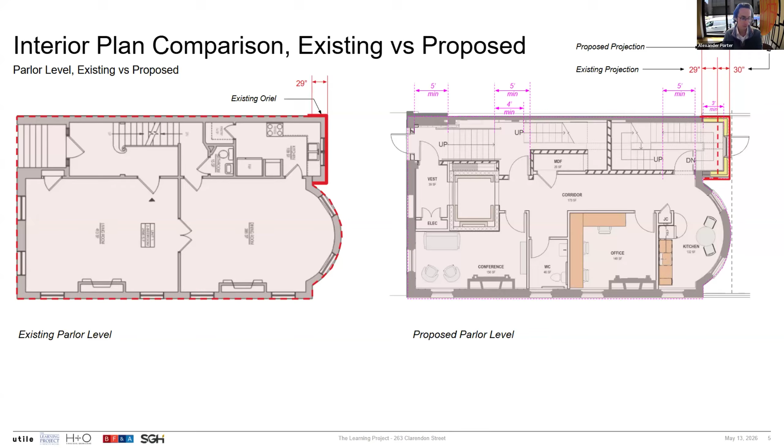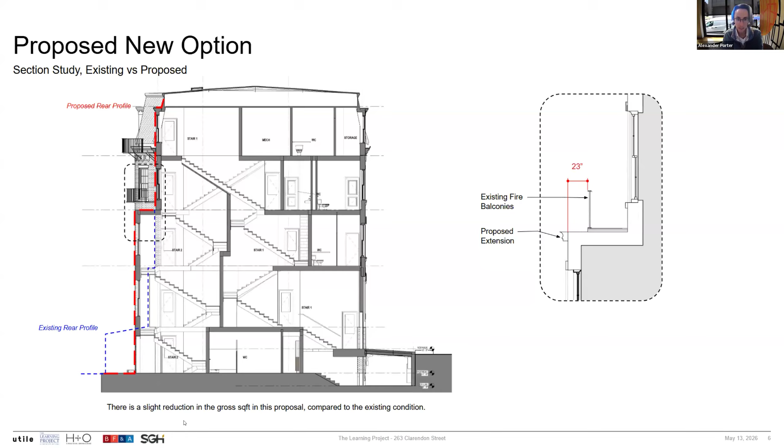We also did an area analysis, and this extension is actually going to be a little bit smaller than the current building.

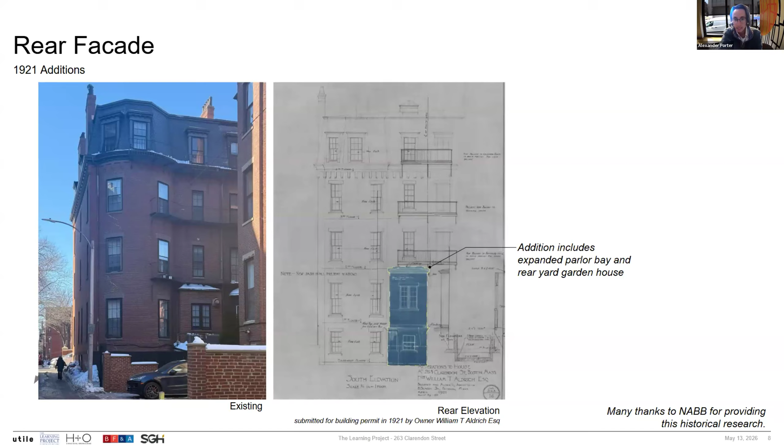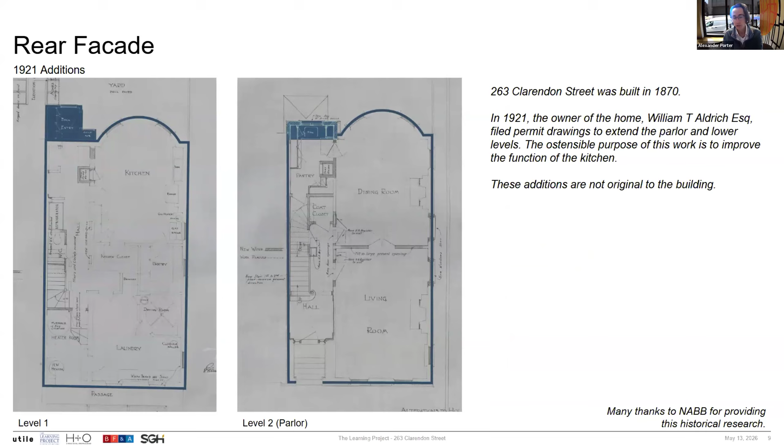So this is a picture of the back of the building as it currently is today with that oriel that was added, and there's also an addition on the lowest level. We found with the assistance of the Neighborhood Association of the Back Bay that these were additions from 1921 by the owner. The next slide shows the plan so you can see those two additions that more or less are intact today: the projection to enlarge the kitchen on the parlor, and a kind of storage room on the lower level.

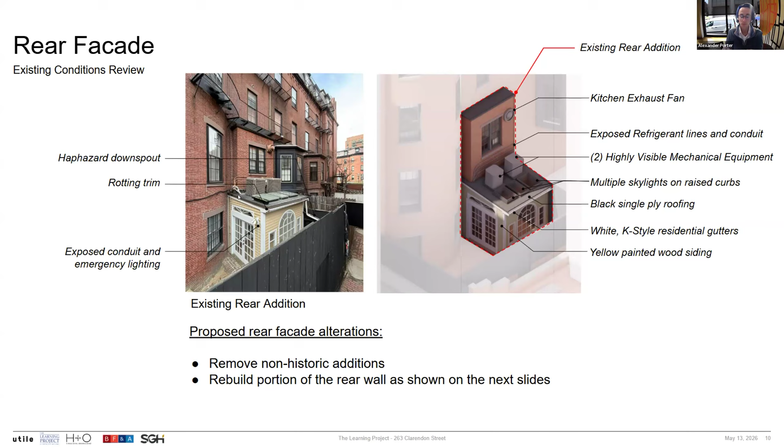So these are not original to the building, and today when you look at the additions, they're a bit of an eyesore. They have a number of undesirable conditions we want to rectify, including an exposed kitchen exhaust fan, exposed condenser units that are highly visible for the neighbors and from the alleyway, a lot of exterior trim in disrepair, and exposed conduit feeding both the electrical fixtures and exposed line sets feeding that equipment. So we think this proposal is a way we can eliminate all these conditions and provide something much more trim and in keeping with the residential character of the alleys.

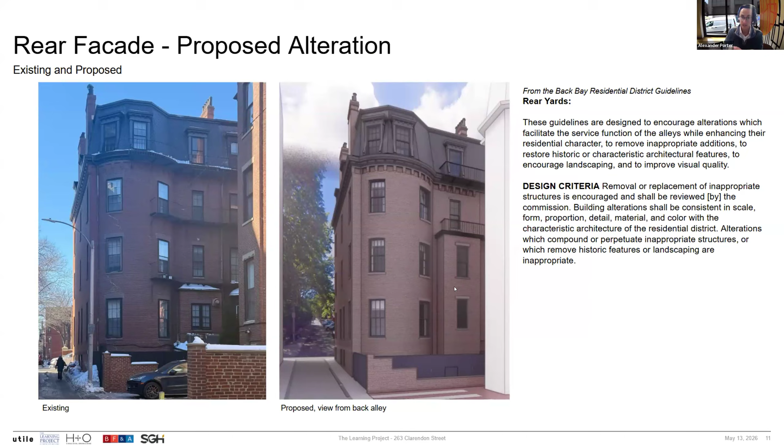So here again is that comparison we discussed with the subcommittee, which we believe enhances the residential character of the alley, as the guidelines request for the rear yards. You also see that the fire balconies that currently extend past the bow of the building, we're going to cut back so they can still provide fire assistance and entry into our second stair in the event of an emergency, without encroaching on the bow of the building.

This is a view showing the same addition from Marlborough Street. It's not visible from this vantage.

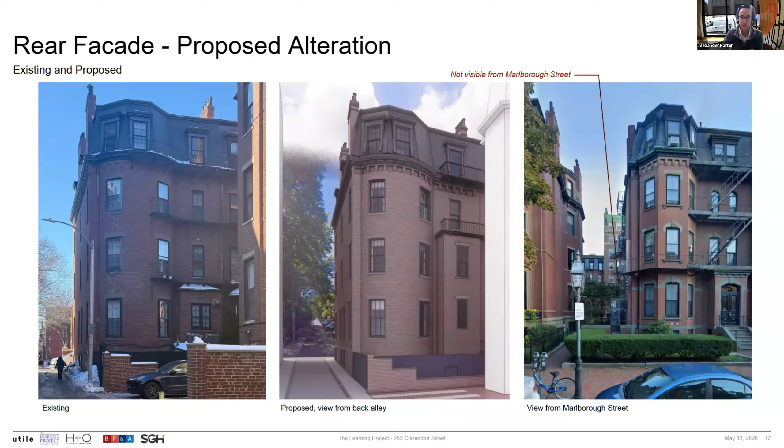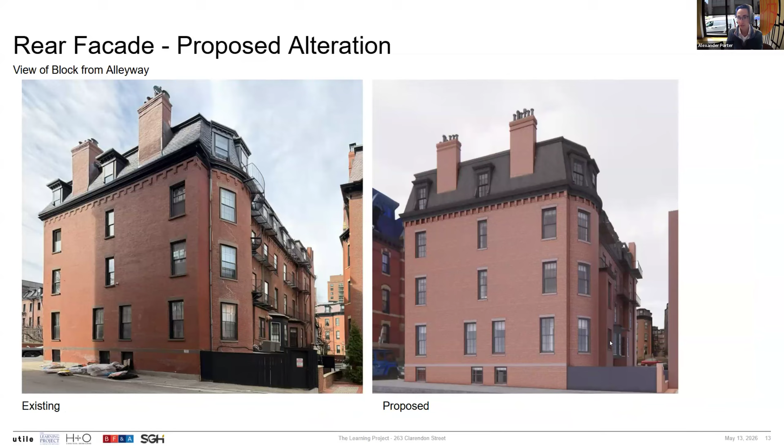And then another view from the alley showing the existing condition on the left and the proposed condition on the right, kind of showing that it is keeping in rhythm with the bow, the two oriels of the neighbors, and then an existing step of the building on Marlborough Street.

We have to provide some air source refrigeration equipment to heat and cool the building using electricity. This will be an all-electric school. It will not use fossil fuels to condition or provide any energy for the building's domestic hot water.

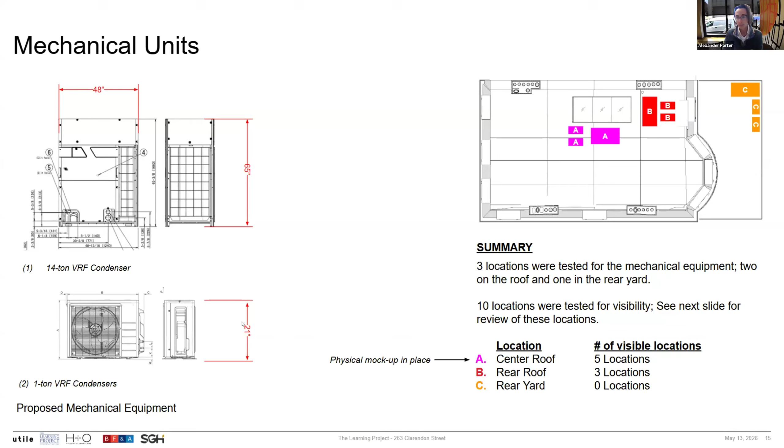So these units come in the form of a 14-ton VRF condenser and two 1-ton VRF condensers. Those smaller ones are more residential size, while the 14-ton one is a bit larger. These units have to sit on stands to avoid snow accumulation.

So we studied 10 locations and took photos, mathematically calculating which locations were visible and from where. The magenta location in the center was visible from 5 locations, as Joe mentioned, both in public alley 423 and 424, as well as some locations in the park. I'll show you enlargements in a moment.

Location B was not visible from the front, but much more visible from the back, so that was a consideration there. Location C is not visible from any location in the public way.

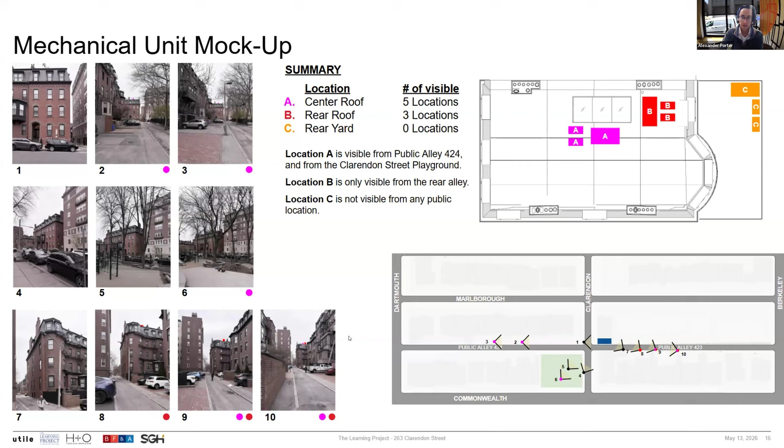So the next couple slides just walk through these views in large. This is right in front of the building. This is moving back down the alley. You see in magenta the location of that equipment.

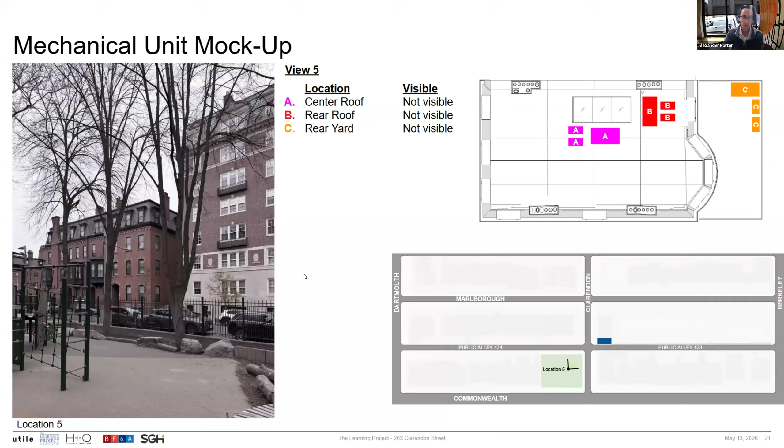As we move further down alley 424, it's not visible from Clarendon Street or from that location, but if you back up to the next location, you are able to see it, albeit through the branches of the trees.

Moving down public alley 423, neither location is visible from here, but as we back up, they become more visible. This location, you start to see the units in location B, and moving back, they both become more visible as you move further away.

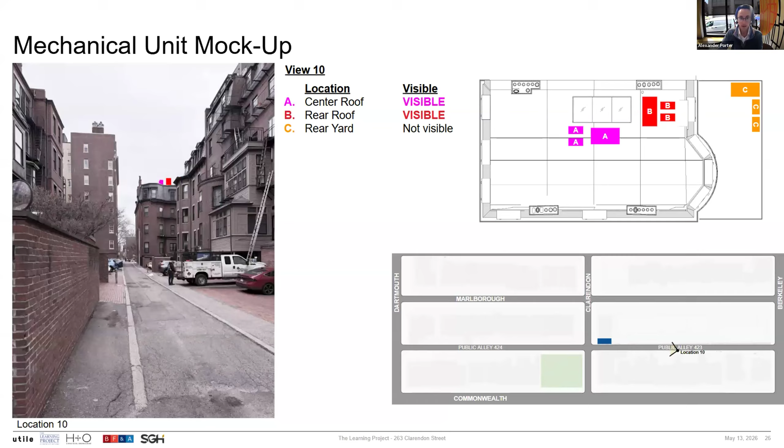So the next slide is our other solution for location C, which puts the units in the rear yard. We discussed this with NABB in their meeting last week, and would be open to considering some screening additionally if this is the preferred location by BBAC.

These units, even on their stands, will not extend past the fence because this is a recessed, sunken lower level, and that fence will extend over them by at least a foot or two.

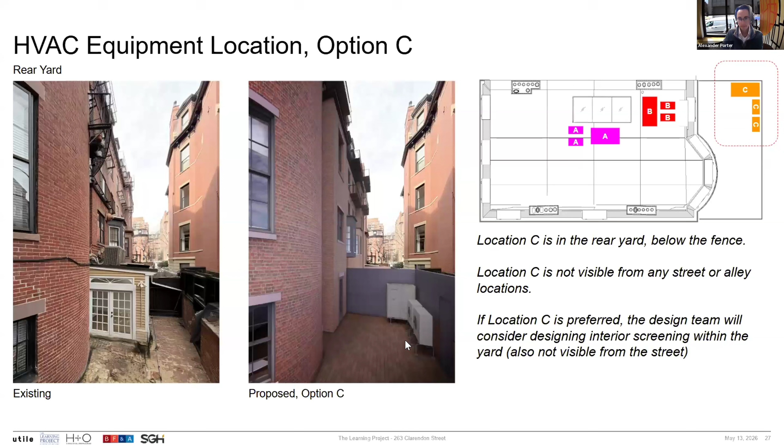Then just to show you the other roof penetrations, these are all pretty ancillary, but there'll be a couple of air intakes added to this roof. They'll be quite low, 15 inches or so, not visible from any location.

We are removing 4 rooftop condensing units, regardless of the location that is selected for our new condensing units that you see right there. And you, I believe, told us before that there will not be any elevator overrun. Is that correct? That's correct, Tom, and we have a slide about it, our last slide in the deck.

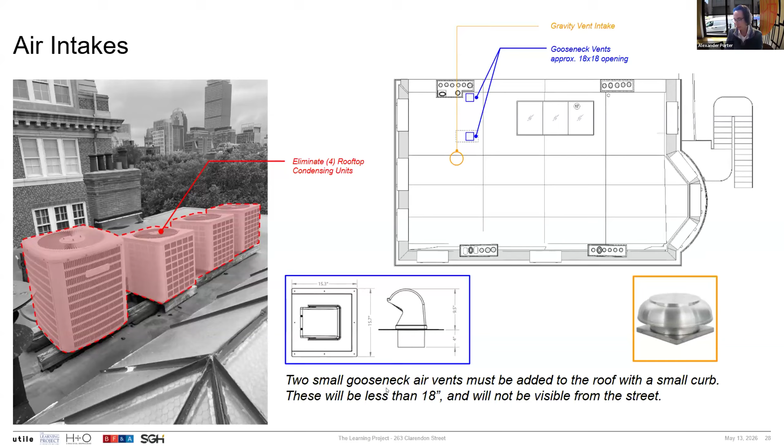Sorry. No, jumping in- that's okay. Yeah, all right, I'm going to keep going.

We can certainly come back to any of these slides. But I want to get back to the front of the building. We have an existing condition where, as we described in plan, we have steps that get us to that first floor, the piano nobile. You can see the existing condition here.

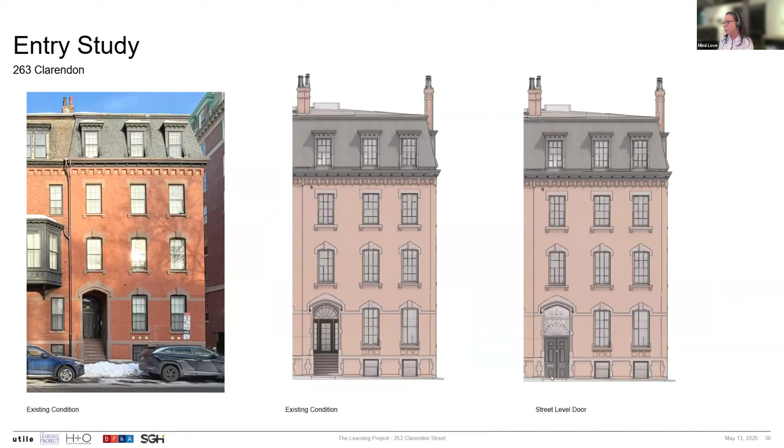Because we need to create an accessibility entrance, we are proposing to bring that door down to street level. And you can see the reason that solves our problem is that once we get in the building, we can create a lift, a landing for access to actually the elevator in our new proposed scheme, and then stairs that get us back up to that first floor level.

We're pushing the stairs back. One thing I just want to highlight is we talked about a couple of examples in the Back Bay area, but 267 is a building 2 doors down where we think leveraging somewhat symmetry, it's not identical, would be a nice solution.

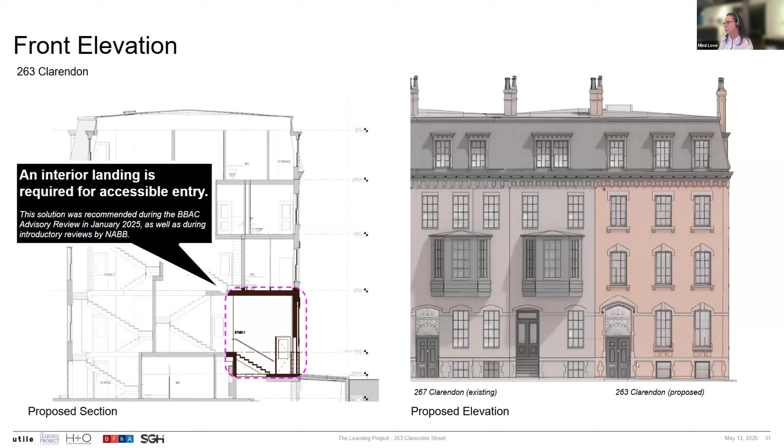That door, it's not quite an ADA condition because it has a 7-inch riser underneath the door. We would have to be flush at grade in order to achieve it. But this is that side by side, that's that 7-inch rise that I was talking about.

There is an iron work that we think would be nice to replicate, again, to create that balance and symmetry of that elevation on Clarendon Street.

And we're taking some cues from the geometry. We have that lintel here, which really dictates some of the trellis components, the pure geometry of the fan. And the reason I'm mentioning this is because we've really worked on the proportion of the door. We think an 8'6" door really allows the geometry of the ironwork above to work well with the proportion of the door below.

The 267 and 263 are more or less aligned, but they're not identical because we're proportionally trying to make sure this door is appropriate for its entrance, which is a bit wider than at 267.

We are looking at two solutions, one that has just fixed panels and another option that has side lights for viewing and security visibility in and out of the doors.

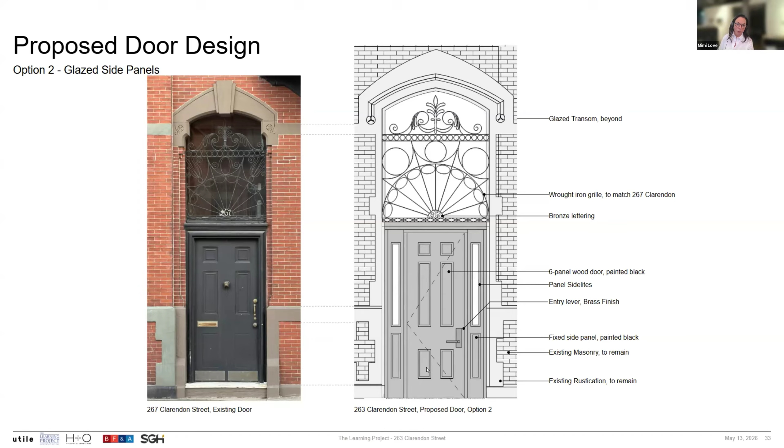So this is our proposed solution. We prefer the side lights, but are open to comments.

And we would like to replicate a sign similar. We haven't really gotten into what the text says, but it will definitely identify the school. We think it would be appropriate here beside the door.

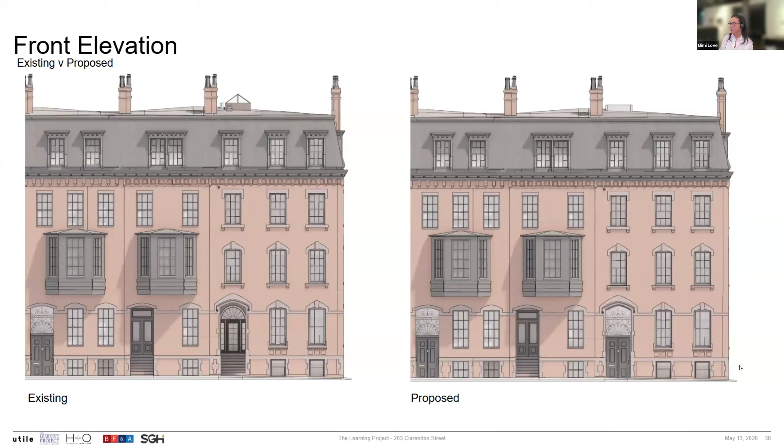And so this is a comparison of the elevation that exists today and what we're hoping to accommodate with that ADA solution. And again, it balances out the elevation that faces Clarendon Street.

So some additional items, just so we're aware of the scope of the work. We are planning to replace all of the windows. We think this is a benefit because they will be true divided lights. These windows were replaced in its former life.

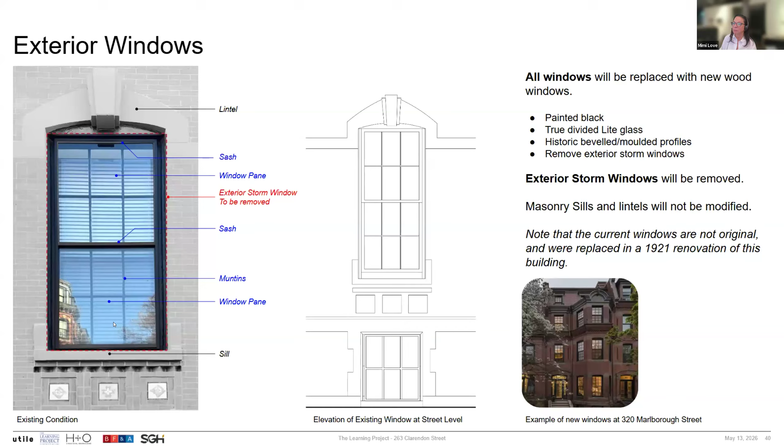We're going to be able to remove the exterior storm windows. We are looking at Belle Isle windows. They were used at 320 Marlborough Street. Again, they have true divided lights, and that will be a replacement for all of the windows.

The other item, which is really just a maintenance issue, is the skylight that exists, which is in terrible condition, and we want to replace it in kind. The location, the size, the dimensions will replicate what's there. We will have to have an exhaust, but that will be a minimal opening that we'll include, but otherwise it will be replaced in kind.

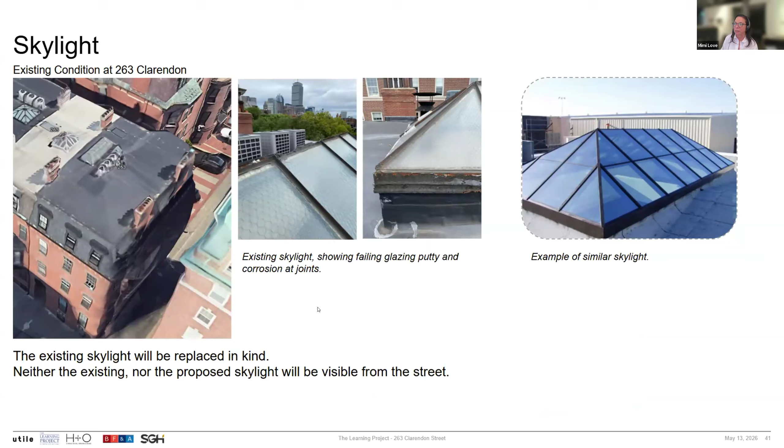And then the fence - currently there is an existing wood fence. It does have a raised door to provide access to the easements along the way. There's some stairs that connect all the rear yards. We're proposing to do a fence that's similar and made out of wood.

And what color is that going to be? So we prefer to keep it similar to what it is. Right now it's really a black that we think might be a bit too harsh. So we think in the darker tones it could take on a green tone. We like this black forest green color. Just to give it a little bit of color, but black iron could be another consideration.

And then we have minimal lights that just light the pathway. We think something that could just be simple and almost not call attention to itself could be a good approach.

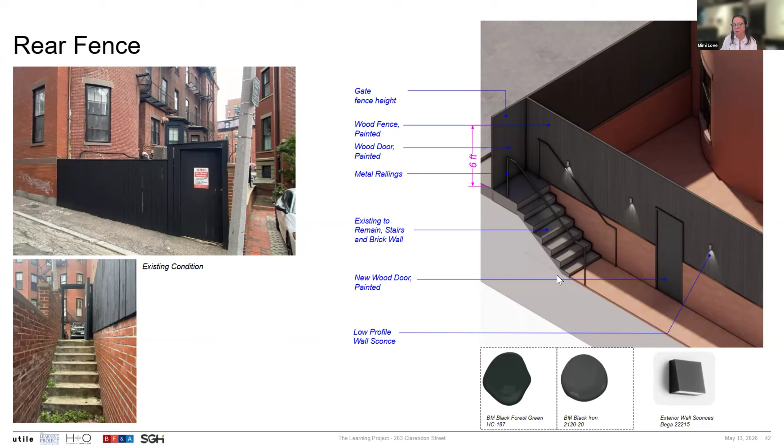So we talked about the height of the fence. So this is a construction - we imagine the exterior will be tight joints. It'll have a top cap, but on the interior we'll change the boards to be horizontal, just to be able to have some gaps within the frame construction for movement and breathability.

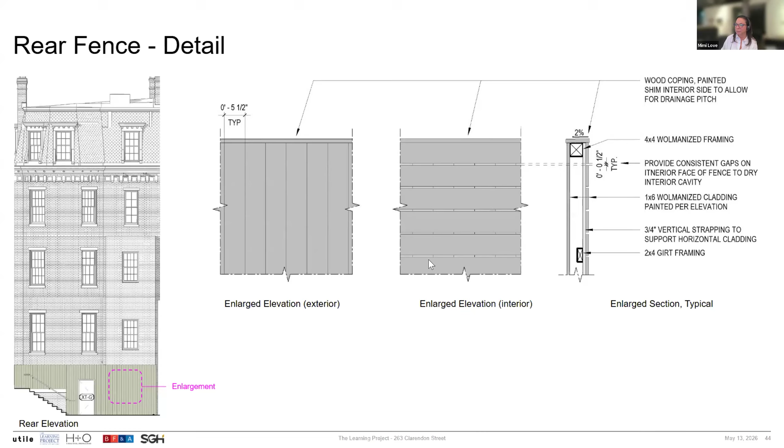And that's all we have. I know that's a lot. We're happy to go back to any slide.

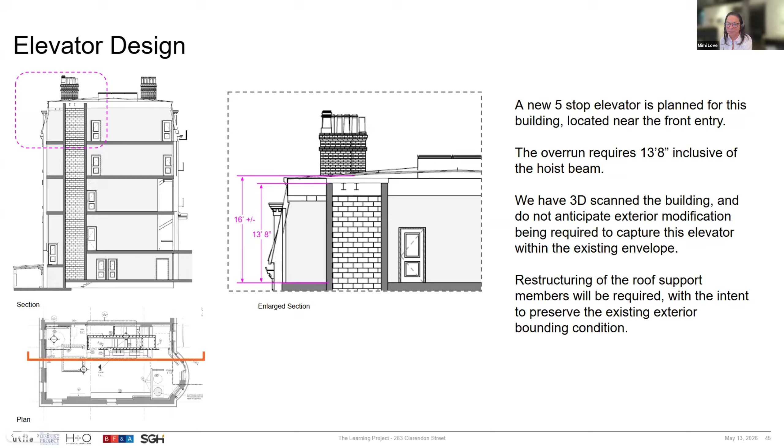Fortunately, you have all of the subcommittee members here. I know, that's really fortunate. I think Rob, you're muted. Sorry about that. Yeah, Lisa was on the subcommittee. Yes, all right, well, yes, the president is on the subcommittee.

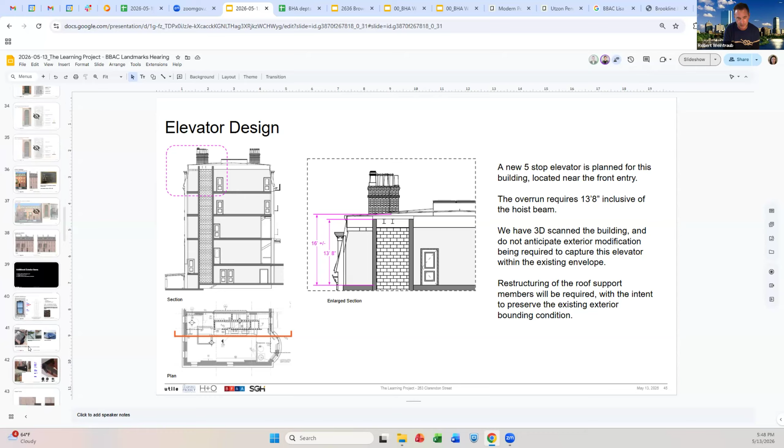Yeah, I think the fence is wonderful. The downlights are appropriate for security and visibility for walking. The color, I'm indifferent - black or the other two that you recommended. Those are interesting colors.

Yeah, I'm ready to make a motion. And I agree with Rob. I do think there are some precedential issues we've talked about - because they aren't precedential, this is a unique kind of building. We are making some deviations from the guidelines, both in the front and the back. And if we decide to put the HVAC equipment on the ground level, which I agree with Joe makes the most sense, so I think as we craft the motion, I'd like to suggest some language relating to that, just to make it very clear this is a special case and not a precedent.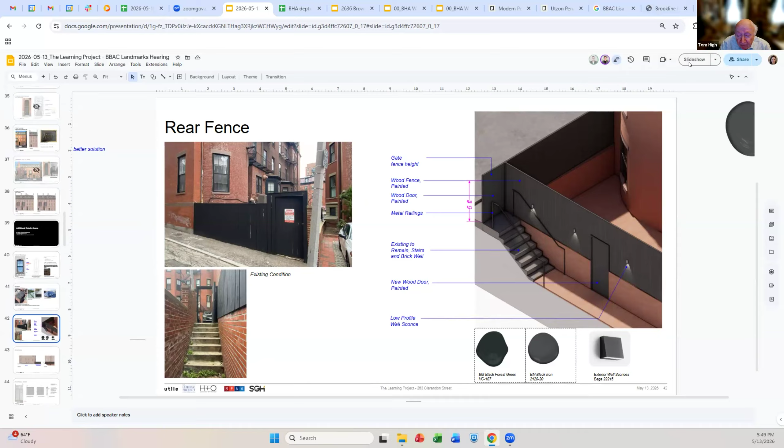But I also think that some of the details we've talked about can be handled if Joe's willing to refer them to staff - location of the signage, color of the fence, and all of the other details. I don't think you're far away from where we would all be, but I would want to have Joe take a look at the final and have final approval of those.

Okay, Joe, please, are you ready to move to comments, or does anybody else have some? Rob, was there anything more you wanted to say with your motion? No, I mean the sign's appropriate.

I assume the sign is going to have a black background and be in brass and be the same size, or thereabouts. I can't imagine they'd want to change the language too much. So I think the sign's fine.

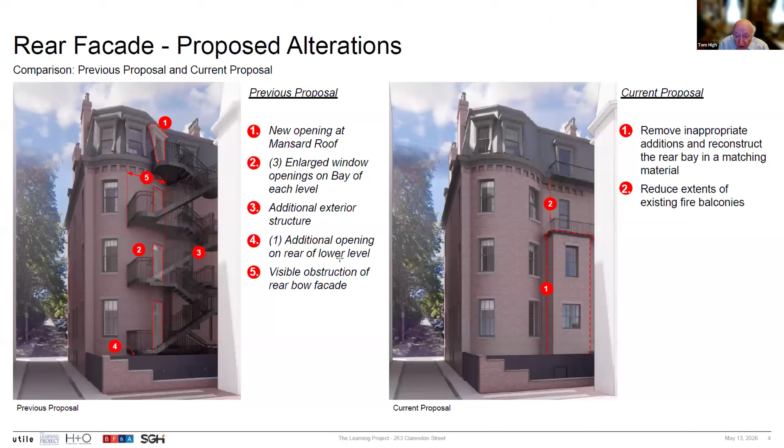Are we all okay with having the HVAC equipment on the ground level? Oh, absolutely. It's not necessarily a precedent, Tom, because I think we just have to make it clear that this is an unusual building, both because it's been approved as a school and because of the size of the building, which is atypically small, and its location on a corner. It's really quite unusual.

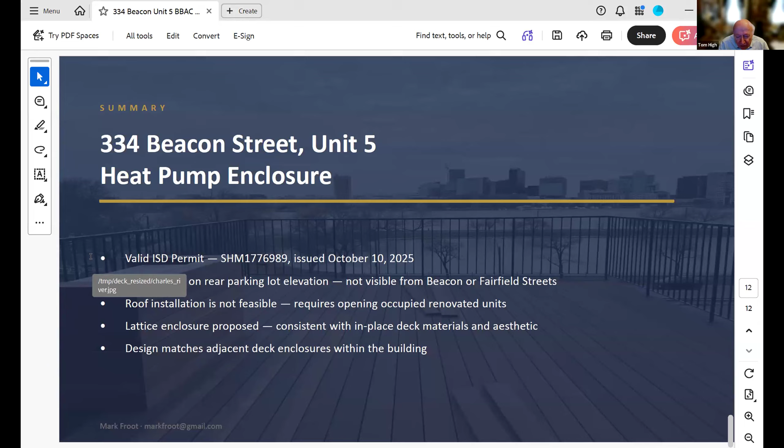What you look at from the ground, you still see the equipment because of the way the lattice is designed. Can you give more detail on what that's going to look like and how visible the equipment's going to be once it's put up?

Well, the intent would be to use this exact lattice here. I don't have the exact dimensions of the slats offhand, which we can report back to the committee. But the intent would be to cover it as much as possible and try to blend it in.

Can you move the equipment further in towards the center of the deck? We can. The only issue is there's one window from the unit that looks out to the deck and to the Charles River, and placing it there would completely block the view.

The location is on the parking lot side of the building, on the back street, not particularly visible from Fairfield Street. And then there's the other air conditioning unit that's been put in the same location on the unit below.

And you're not dealing with that unit? Understood, of course. No, I mean, that was a question — is the unit below different, because it doesn't seem to be masked either, from your picture.

Yeah, Tom, I think that's probably a violation that I'm going to have to follow up on. Okay, yeah, because we're trying to deal with one, and you've got another one which is being used as a precedent for this. So, the other one is a violation.

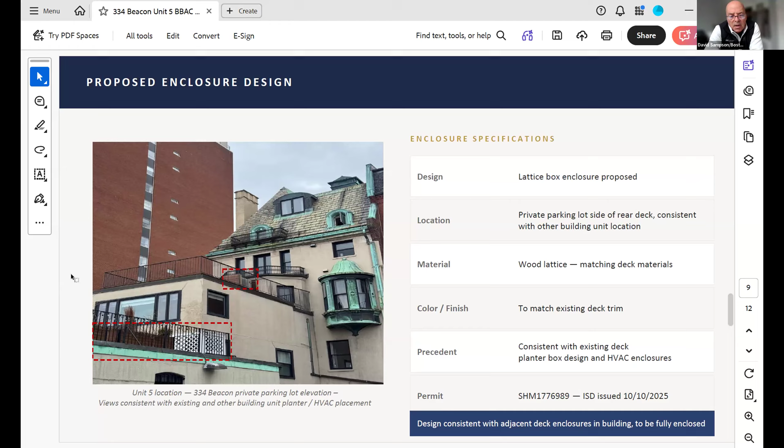Mark, do you have a photo of the view looking out the window so I can see what the deck layout is? This is probably the best one, if you can see it. This is a photo basically as soon as you walk out onto the deck, looking out. So there's effectively nothing else.

We looked at potentially putting it on the right-hand side of the deck, but that view issue is pretty significant there too. You'd potentially be able to see it from Fairfield Street, and given that's a pretty public street, we thought it wouldn't make sense over there.

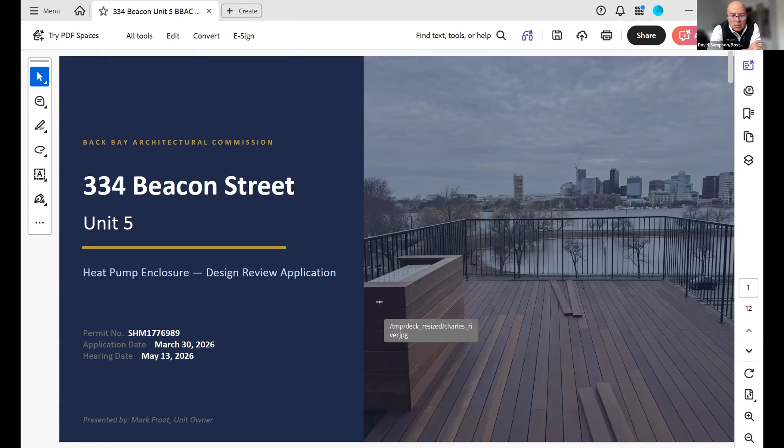And you don't have a photo of the deck from the railing to the building, the opposite of this? I don't have one. This is probably the closest I'll get. I don't have one in this presentation, unfortunately. Looking back at the windows, you mean? Yes. Yeah, I don't have one, unfortunately.

I'm wondering if you can fit this up against one of the windows of the building, or somewhere back in that corner where it's not visible. The problem is the shape of the building — it juts out a little bit, so the ability to put it along there without putting it in front of a window is actually impossible. We would have preferred that, but this location mitigates everything across all those different variables.

Mark, could you show the picture again, showing it from the parking area? This one? Yep, yeah, it's a reasonable shot of it. Is this a heat pump? Yes. Those windows to the right of that box, there's a little walkway down there.

Is there a way to get this down there on the ground where it can't be seen from anywhere? No, that's actually a fully landscaped private courtyard area for one of the other units. You couldn't get it on the side of the building down there? You'd be in somebody's courtyard area.

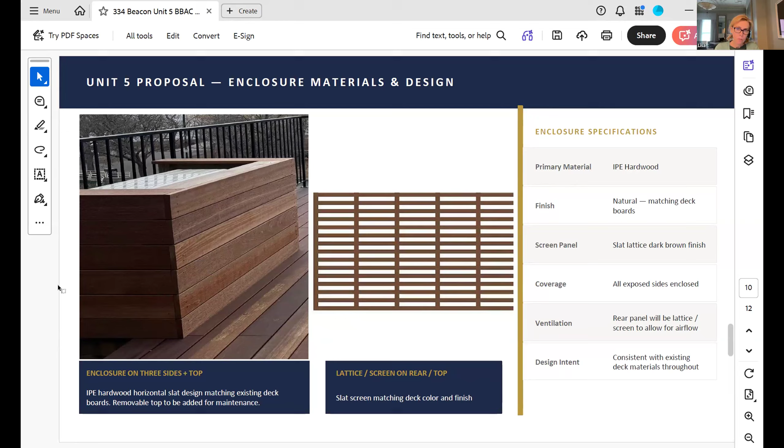If I might, this picture on the screen now, that long wall of the heat pump - if we flip this 180 degrees, that would be the view from the parking lot. That would be the side you'd be seeing, and you would not see the other side from Fairfield, is that correct? Correct. No, you wouldn't - because right now these photos, just to be clear, these photos are with it installed. So from the Fairfield side, you cannot see anything. Okay, I think that's a good idea.

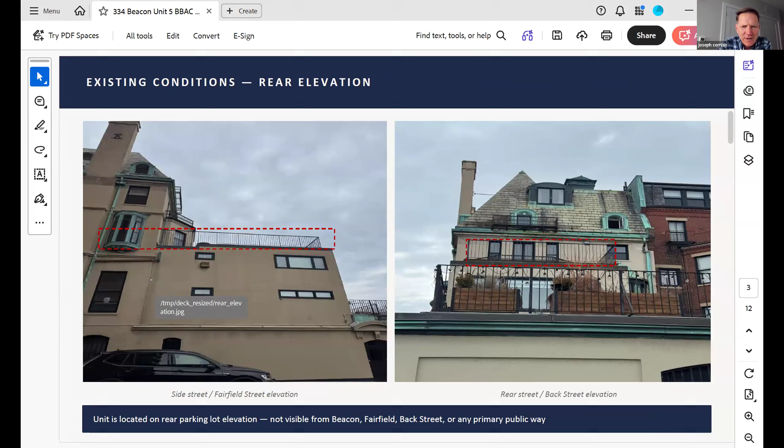I'm ready to make a motion. Okay, I will just - Jeannie, I'll get the script up for you. Here. There you are. It's not showing yet. Do you need me to give back the screen? I can just move to stop sharing if you could share the agenda. Yeah, sorry, I'll give you back the floor. There you go.

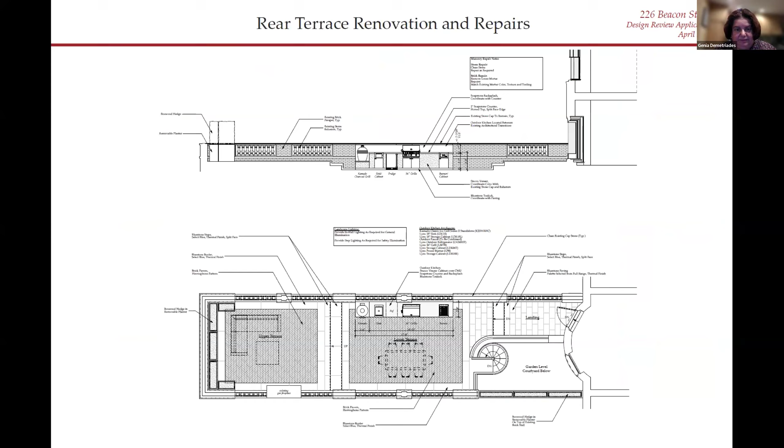Okay, I believe we're going to 395 Commonwealth Avenue next. So Rob, are you here? Rob Clocker? Yep, I'm here. Okay.

Joe, do you want to read your comments first? Sure. This is for application 26.0905BB, 395 Commonwealth Avenue. At front facade, replace upper floor windows, reinstall, recreate historic stained glass, make minor facade repairs, refresh landscaping, and install new fence. And at rear elevation, remove basement addition, create new parking area, garage door and garage access, add basement door and window, replace upper windows, repair facade, and provide new landscaping.

Staff notes that 395 Commonwealth Avenue is a 5-story row house built in 1899 to 1900 for Frederick Eyre and designed by Alfred Manning and Louis Comfort Tiffany. The proposed work is similar to work previously approved by the commission in 2022, and I circulated those plans to all the commissioners.

However, the rear garage door is larger and there is a reduction to the landscaping at the rear of the property. The proposed plans show a proposed roof deck consistent with a deck approved in 2022, but similar to the previous application, that work was not included in the written project description. So that will not be included in tonight's review of the project, and we can review that at a later date. Staff recommends approval, finding that the proposed work is similar to what was approved by the commission in 2022. The applicant will need to submit a new application if they wish to proceed with the previously approved deck.

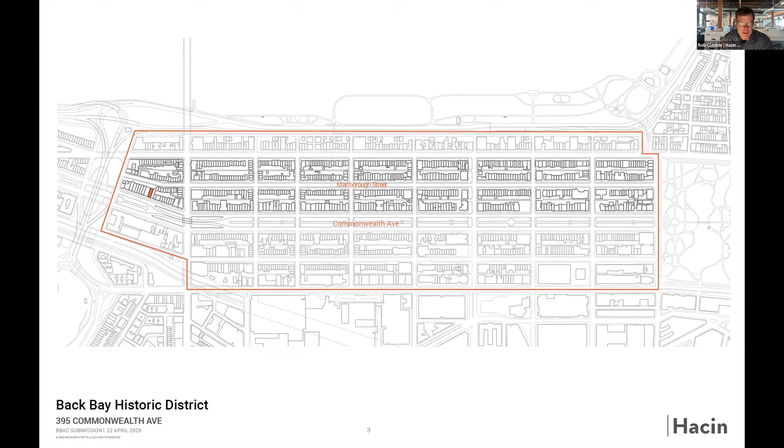The Commonwealth Avenue facade is unchanged since 2022. No work has been done on the building, but it had previously gotten some restoration work by two owners ago. On the first floor there's an existing half-circle stained glass window over the entry door, and the three panels adjacent to it are just plastic replicas put in as film, but the original stained glass in the two side windows is missing. The center window is in a crate inside the building, and there was a previous review by a contractor as to how to restore that, as well as recreate the two side windows based on that patterning.

So what we're proposing at the front of the building is to do exactly that: put the center stained glass back in place with original material, then recreate the two side pieces.

The notes in red indicate changes to the facade. The ones on the left are removing some accessories that were added to the building, and I'll talk about the fence in a moment. At the upper floors are non-original replacement windows that we're proposing to replace again with wood windows of similar configuration to what's there now. We have in the package some illustration of the type of all-wood windows we would use.

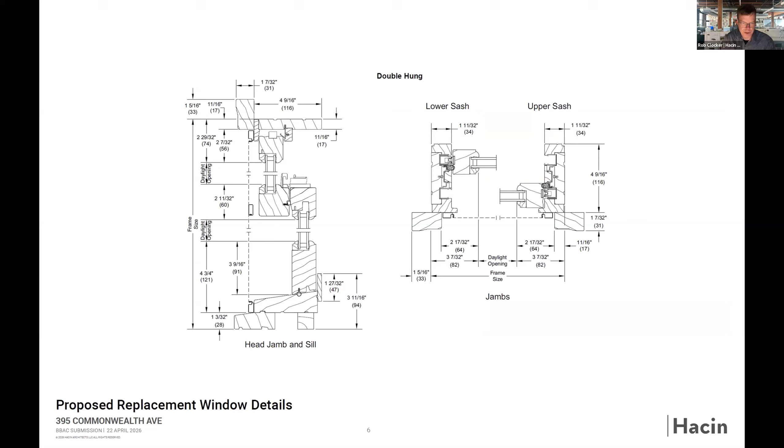Here are some close-ups of the existing conditions at the entryway and some of the fire beacon that we would remove. There's a lower area down below which has original curved wood windows and doors which we'd leave and restore.

For the landscaping, very similar to what we talked about previously, and we can get into questions if need be. We're replanting the front garden, retaining the existing tree, the existing magnolia, and we've talked about taking the existing fence down, which is a tall, non-original fence, and replacing it with a design somewhat like you see here, derived somewhat from the mosaics on the facade.

We had a slightly less ornate fence in the previous package. After talking to the Neighborhood Association of the Back Bay, they suggested giving this fence a little more heft, so making the members heavier, and we've also densified it to respond to those comments. This fence was previously approved, and now I think it's gotten even a little better through ongoing conversation.

Can I ask a question? Would you prefer to talk about each facade as you go, or go all the way through the presentation and then come back? The pleasure of the commissioners. Well, why don't you go ahead with the front, and before you leave the front I have a couple of questions. I think that's it on the front, so go ahead.

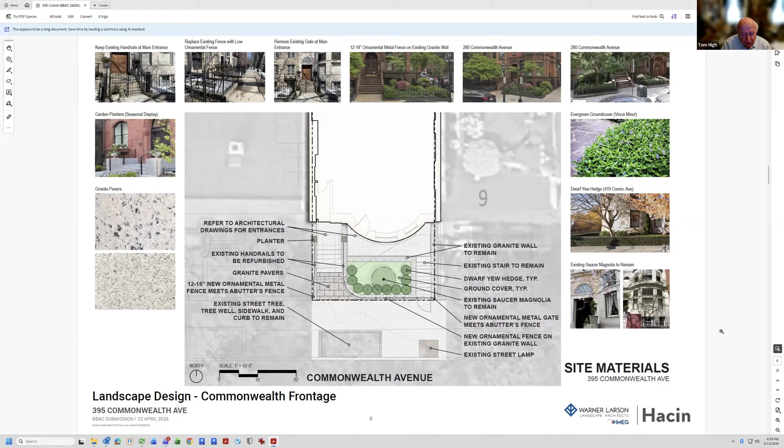I'm going to switch back to full screen here. So for the rear, the one update we made to this presentation is we dropped 397 Commonwealth in. Our office also did that project, and you're correct that we presented both at a very similar time, not together, but back in 2022. They were owned by the same owner at that time. The existing condition of the rear facade is very similar to what it was back then.

There is this low basement addition, which seems like it's part of the parking lot, but it's actually an interior space covering up the lower portion of what was once part of the rear facade. We can see there are five brick headers on the wall there that used to have windows in them—there's a close-up down here—where we're proposing to remove that basement addition, resurface the parking lot, and open up that facade.

The other aspect is these two windows at the first floor level, which are not original. They have more ornate headers, so they were larger windows at one time. We don't have an exact record of what they were, but back in 2022 we made the case that they're of a size where a type of expressed bay window might be appropriate. We proposed to articulate the windows with the smaller one being a flat window and the larger one a bay window, similar to this lower picture, where it's all within the masonry opening so we don't have to introduce a roof above, but still give it some dimension.

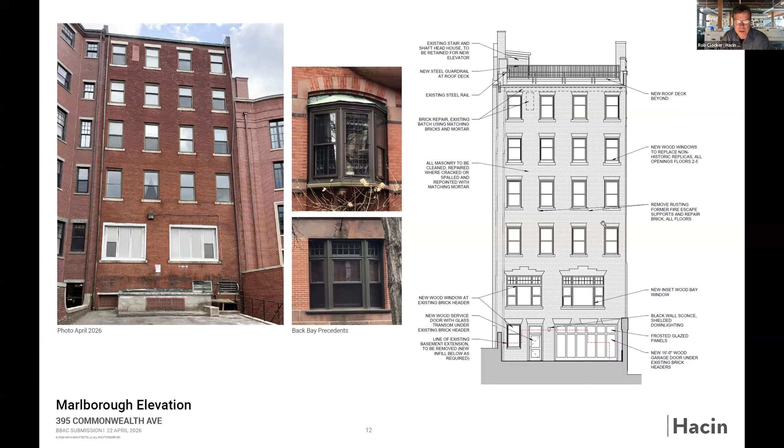I'll show you some images of what that would look like in context. As Joe mentioned, we had a garage door in 2022, but it was situated under only two of those brick headers. So we've widened it out to the third, because that small garage door was actually somewhat impractical for getting into that space with a car. Then we'd have a door in the next position, and finally a window in the last one. The whole surface back there would then be brick.

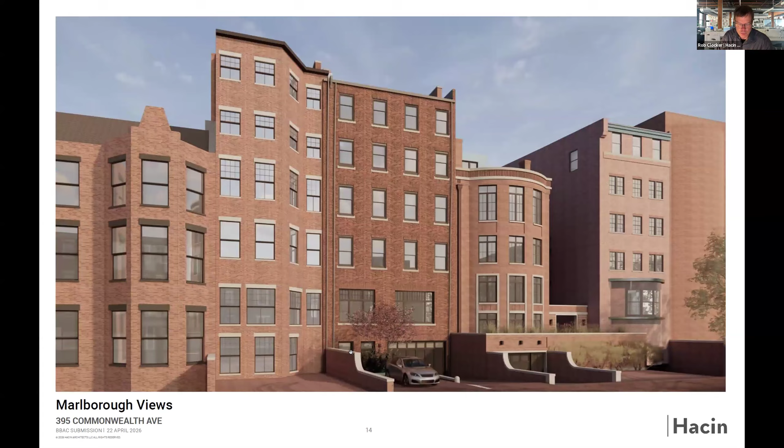We'd rebuild the garden wall on the left to match what was already built at 397 on the right. And let's see if I have this—in plan, you can see on the basement where that garage door would be, and the need to make it wide enough to fit a second car to get inside. Then at the second floor where those windows are, that would be replaced.

That's the 1st floor, not the 2nd floor.

For the landscaping of this area, we'd be using brick in two different patterns: a herringbone pattern at the area where we'd still have a location to park cars, and then a running bond that goes down towards the garage door and into a small walkway to the other door.

In the package we presented in 2022, we had enlarged this back area because we were trying to create a garden that could be viewed from inside the home. What's changed here is that garden has been removed and the planter has been lifted up. It was down at the lower area before, so we've lifted it up so it's more visible from the parking lot, and there's no garden for the house.

Here's a cross section of what that would look like. There are about 4 steps down, and the planter is here. When presenting this to the neighborhood association, there was a request to try to get this planter bigger, to get a larger tree back there. It's somewhat impractical given the space constraints and the geometry.

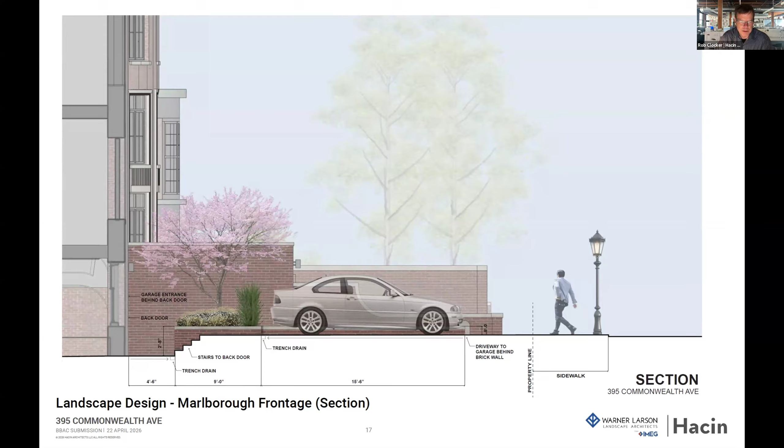We're hoping that at least this level of planting will be a good addition and a very positive change to the facade of this building. And here are a few views of what that garden would look like and what the paving would look like. That would be the rear of the building, and we'd be happy to answer questions.

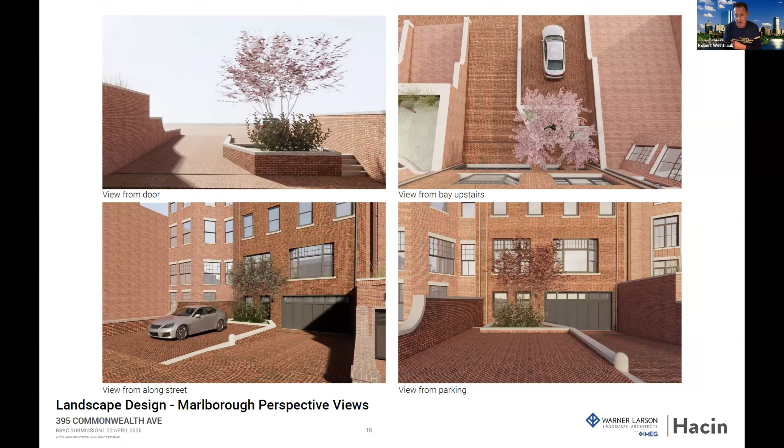You mentioned that you didn't like the fence and didn't think it was appropriate. There's a garden now where one did not previously exist. That's true. So a fence would be appropriate to keep it uniform with the neighboring buildings.

I agree with Tom that granite pavers are inappropriate, not to mention they don't last very long—they tend to crack. I know that firsthand where I live; we actually removed our granite pavers and replaced them with poured concrete. It always seems odd to be arguing for concrete in the Back Bay, but at some point it's appropriate. In this case, it looks much better than cracked granite. Those granite pavers up and down Boylston Street are just an absolute disaster.

Yes, they are—a safety hazard too. Everybody on this call knows that; we've all had our ankles twisted on granite. So brick would be more appropriate. Or maybe not, because it has almost like a limestone facade. Or any other material would be more appropriate than granite.

So I like the fence. I think it's a nice takeoff on the Tiffany mosaics. This is a very, very significant building, so a lot of thought has to be put into it. I think this is the only building designed by Louis Tiffany in the United States.

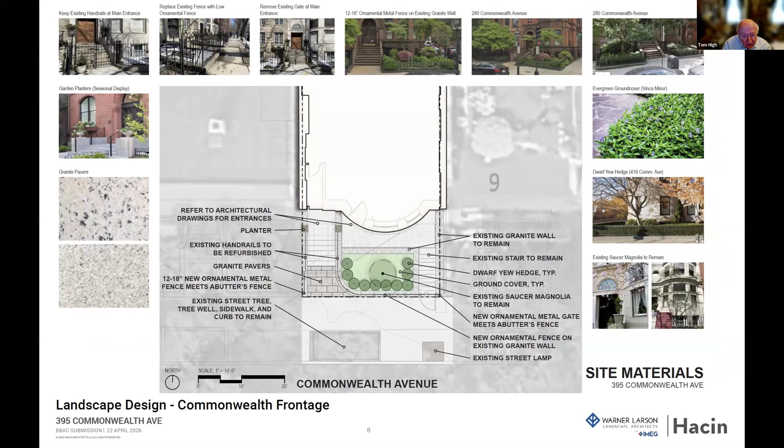I'm sympathetic to what Rob is saying. I think the fence needs a little more. I'd like to think of it as a wrought iron fence, not a pressed steel fence—maybe it is wrought iron, but it looks like pressed steel to me. It needs heft, needs some weight; it looked like it was done in 2026, not in 1900. Maybe if they made the pickets thicker and the posts thicker, and then the actual design—the circles and the diamond—made thicker too.

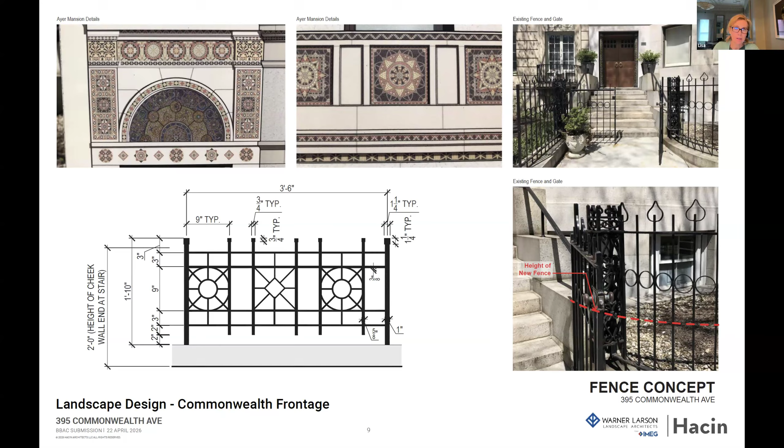And I think that might even be the fence that's still there. Well, I think you're onto something, Tom, about the specific integrity of this design. I mean, the railings at the stairs are so distinctive, this heavy block, monolithic feel.

I think part of the dissonance you're feeling, what I'm feeling as well, is that the wrought iron fence is a bit of a common add-on to an extremely distinctive design. And I'm interested in the idea of a garden framed with plantings rather than wrought iron, because this is so monolithic.

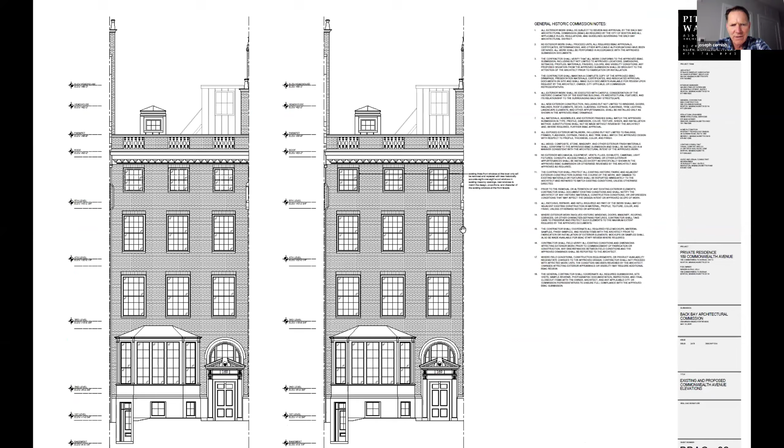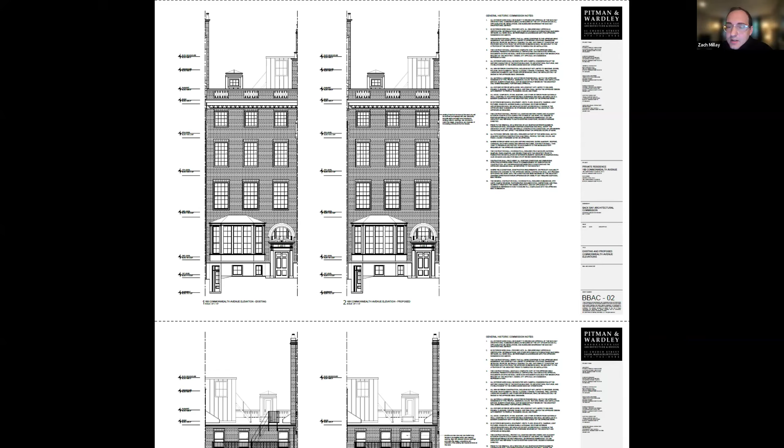So what we have here at 169 is we're undergoing a whole renovation of the top unit of the building. There are 3 existing 8/8 windows that are essentially just going to be replaced in kind, like Joe said, with 8/8 true wood divided light windows. And then we'll submit those final details to him once finalized, and he can approve those. But that's the only work in the front this evening.

And then in the back, there's a missing window at the top floor, right where Joe's cursor is, and there's also an existing fire escape that goes up to the roof. So given some of the work we're doing on the interior, which we'll be presenting back to the board at the June meeting, we're able to remove that fire escape. And again, that is pending some final reviews with the city and ISD, but from what we understand, that's able to be removed.

So as that fire escape comes out, since that is a primary bedroom location, we're proposing to put in a new wood divided 8/8 window, which would be in alignment with the rest of the windows on that floor. Would you also be matching the brickwork at the top of the window and the sill at the bottom? Yes, all the lintels and brickwork will be precisely the same.

And essentially that's all we have today for this part of the application. We'll be back here in June, and I'll send that info over to you, Joe, this week. So we'll have the rest.

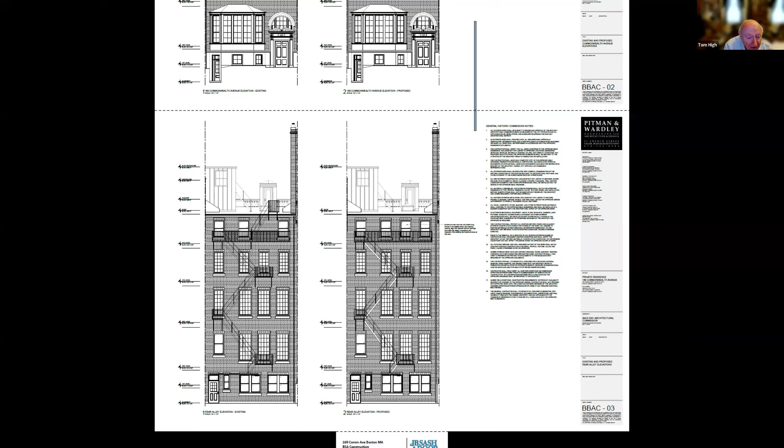Normally we wouldn't be approving new windows on a rear facade, but in this case, both the front and back of this building were totally replaced in the 1920s by Harleston Parker's firm. They made it into a federal style building from what Peabody and Stearns had originally designed, so we're not dealing with the original facade here. As far as I can tell looking at the brick, I don't think there ever was a window there; it was probably designed without one. But to me, it makes sense as long as it matches perfectly to insert one in this case, since it's not original. Yep, definitely agree.

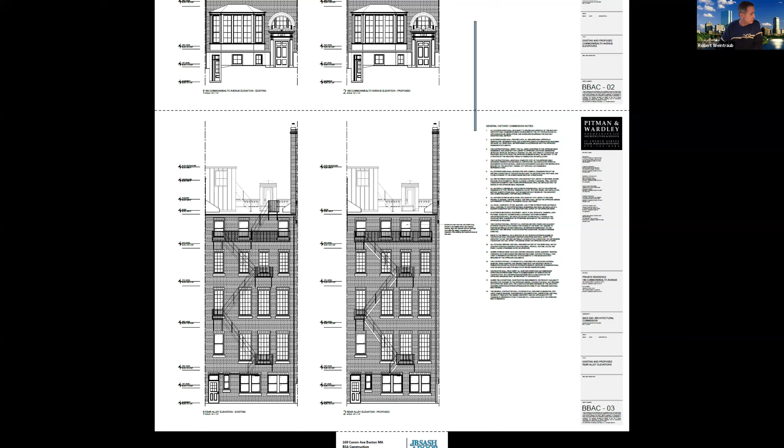I'm ready to make a motion. Okay, let's move to public comment.

Members of the public will now have an opportunity to ask questions and provide public comment on applications and discussions. To do so, please raise your hand in the application via the Zoom meeting platform. If you are calling in and cannot use the platform, you can press star nine to raise your hand, or send your questions to staff via email at backbayac@boston.gov. Public comment will be limited to 2 minutes per person and should be focused on a project's exterior architectural features, which include landscaping. Issues related to use, street traffic, and noise are outside the commission's purview.

And I see Serge has his hand raised. Yeah, Serge Savard, Neighborhood Association of the Back Bay.

Yes, we did review the application. It should be noted that people may have looked at that picture. The sash for this building and the front facades are all white. It's one of the rare instances we have in the neighborhood, but it's probably the applicant will maintain this color, and it would be appropriate for this design of building, but it's quite a difference.

For the window in the back, although typically we're not very in favor of adding new penetrations that were not originally in the facade, since this was rebuilt in 1928, 1929, the window was probably omitted for a technical reason. If it's possible now, we think it's going to bring the symmetry, and it would not alter the design of this building, so we think it's appropriate to allow it, given the fact that this was already not the original facade, but already modified. Thank you.